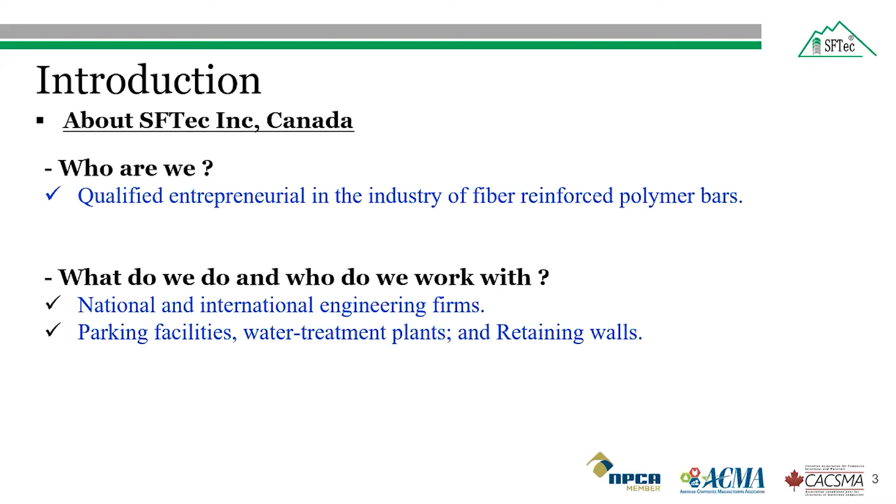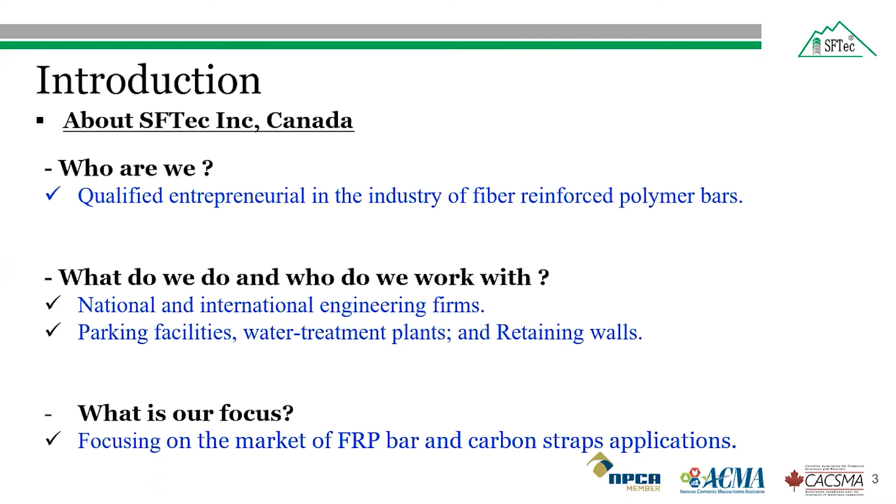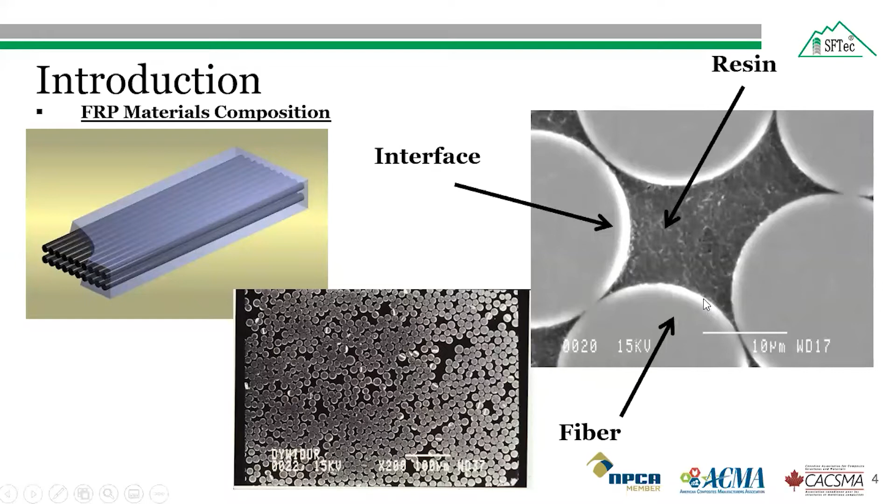Carbon fiber straps. The SFTec fiber reinforced polymer bars are made from composite materials as shown in this figure. It is made of fiber, which can be glass fiber or carbon fiber, and it is manufactured by a pultrusion process using a mixture of recycled fibers and resins. This figure shows a microscopic view of the FRP bar. Three different types of FRP bar, carbon, aramid, and glass, are generally available in the market.

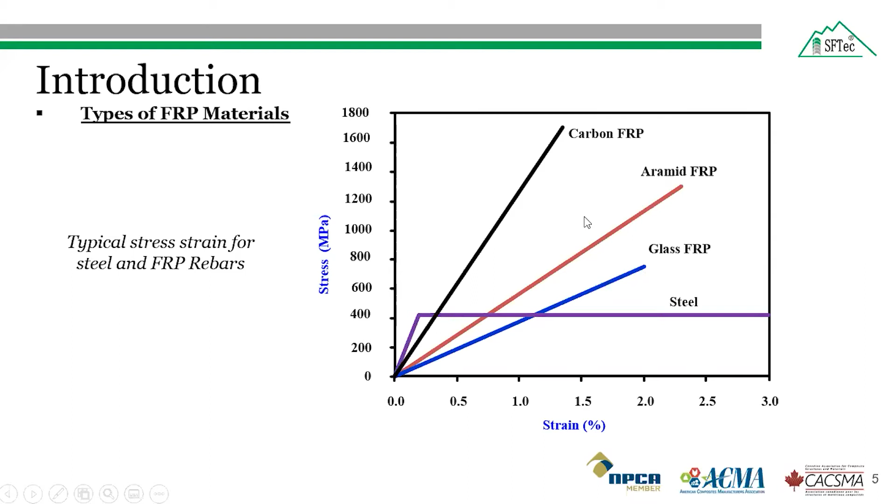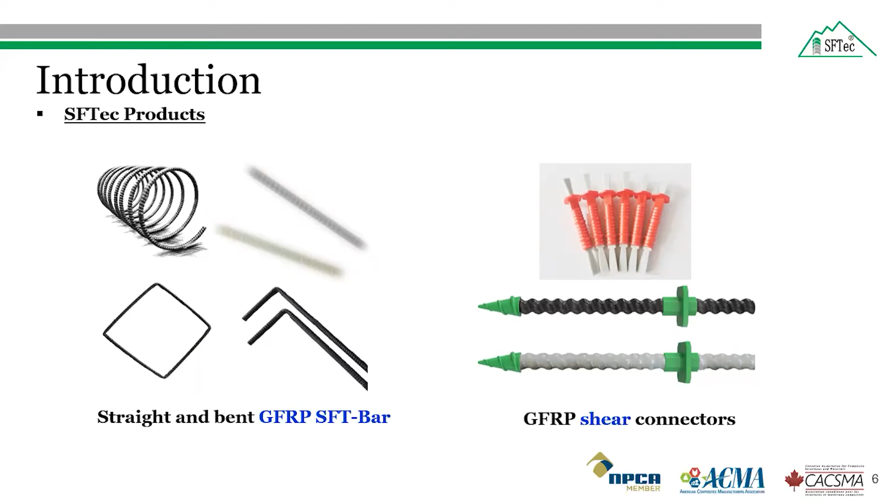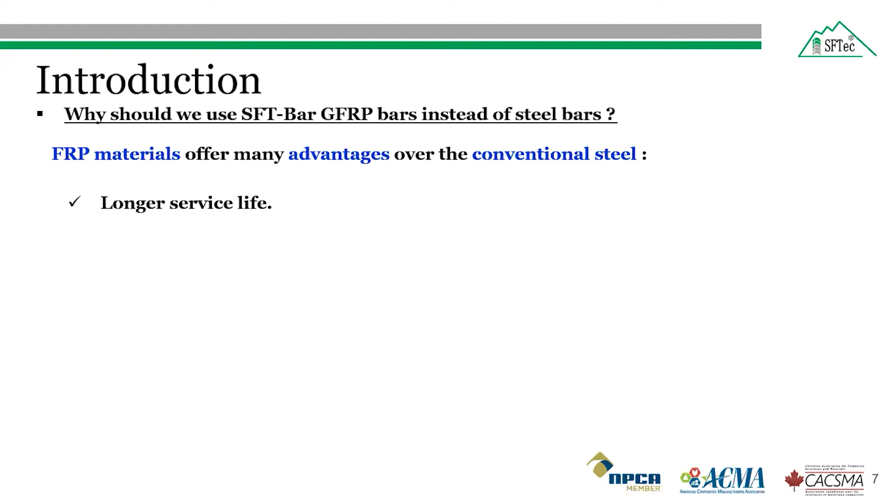And some of the advantages of the SFTec glass fiber reinforced polymer bars over the conventional steel bars are it has a longer service life because of its corrosion resistance, and therefore it has improved durability in harsh environments such as construction near the coastal area. And the FRP bar has better resistance against corrosion compared to the steel bar.

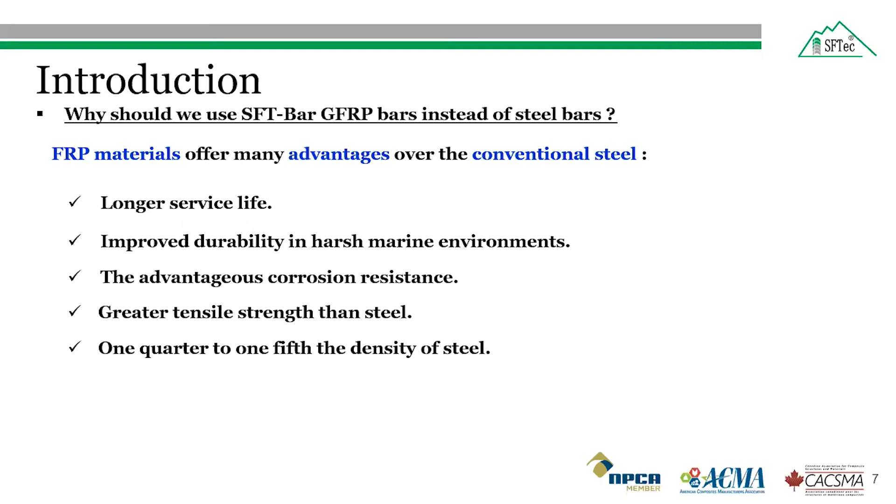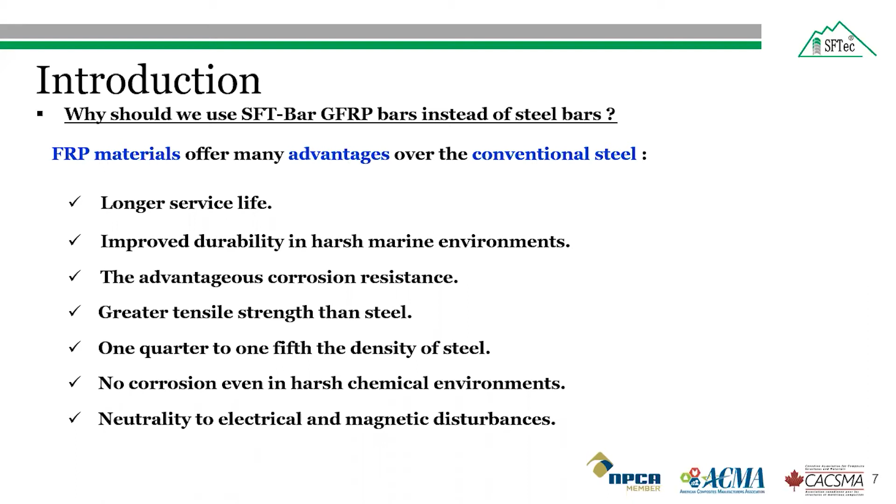As I told earlier, the tensile strength of FRP bar is 2 to 3 times more than that of the steel bar. However, FRP bars are lighter due to the low density compared to the steel bar. So therefore, the FRP bars are lightweight. And due to the corrosion resistance, FRP bars are good for harsh chemical environments as well. And it is neutral to electrical and magnetic disturbance. Therefore, it has a wider application in airports, military, MRI rooms in hospitals.

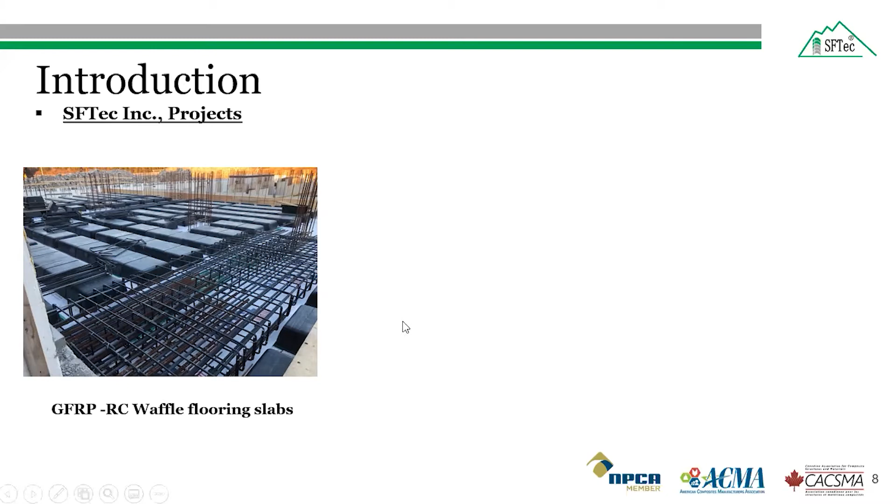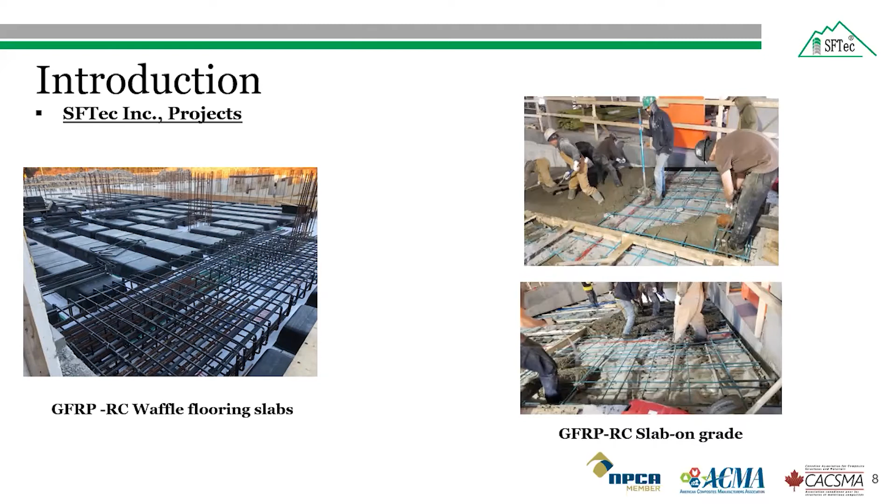And some of the selected field applications of the SFTec fiber reinforced polymer bars we have already done in Canada. Glass fiber reinforced polymer concrete waffle flooring slabs designed with SFTec glass fiber reinforced polymer, which was built last year in Halifax, Nova Scotia. And it can also be used for slab on grade. And slab on grade is a type of non-structural slab. And here it is a one-to-one replacement, and it will save a lot of money compared to the steel bar in terms of labor and transportation.

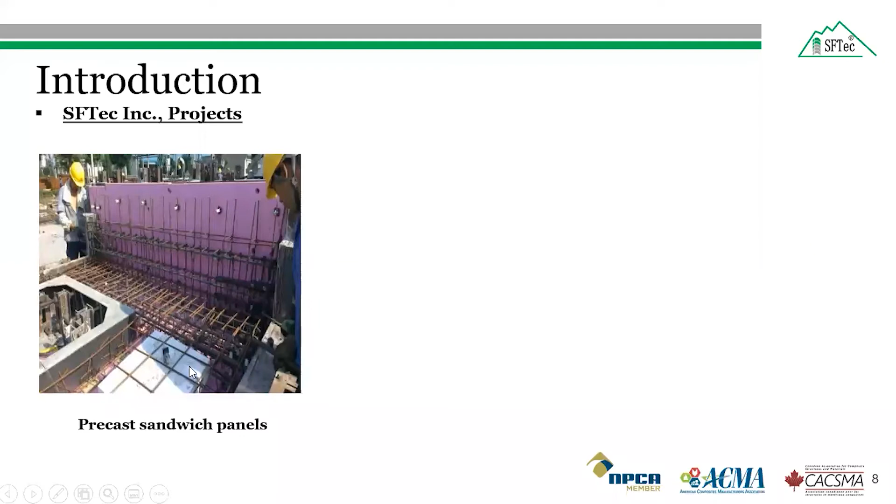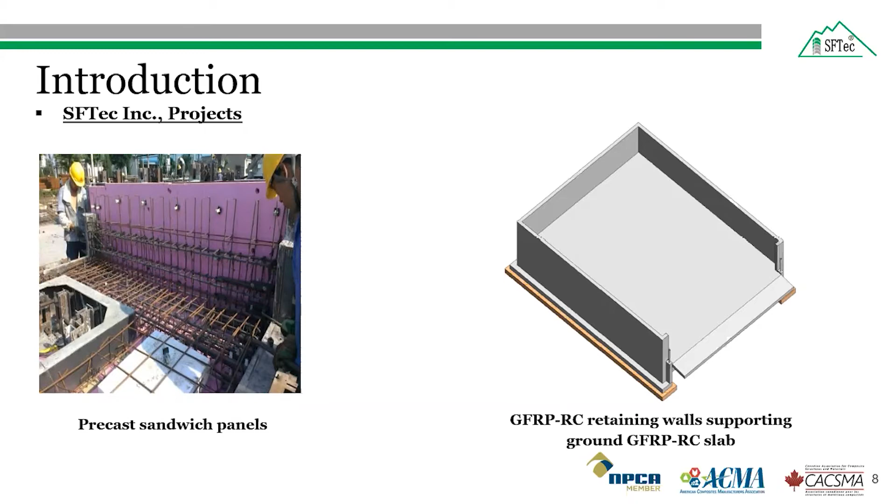Another project shows the cast on-site precast sandwich panels, and they have used our glass fiber reinforced polymer bars in their projects as reinforcement as shown in this figure. And it was built in China. And on the right side, it is a retaining wall which was built for the city of Montreal. And the retaining wall is designed to dump snow with de-icing salt during the winter. So they built this retaining wall with SFTec glass fiber reinforced polymer bar, which provides corrosion resistance against the chemicals used in the de-icing salts.

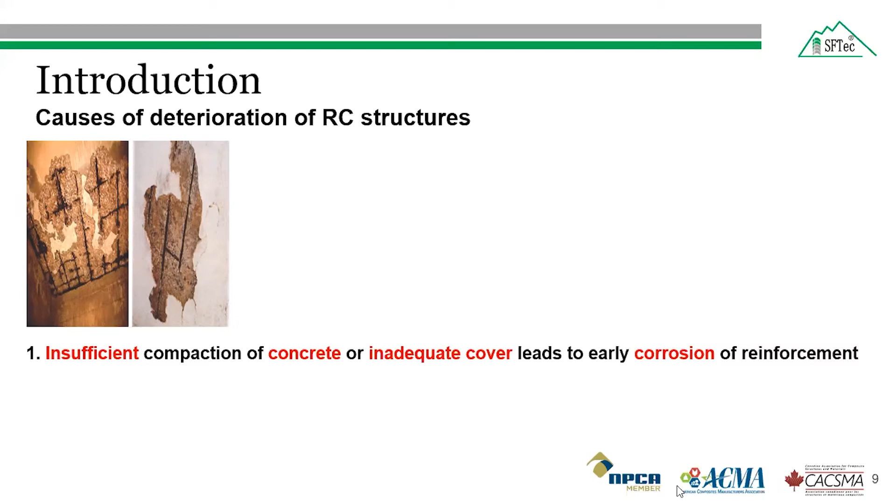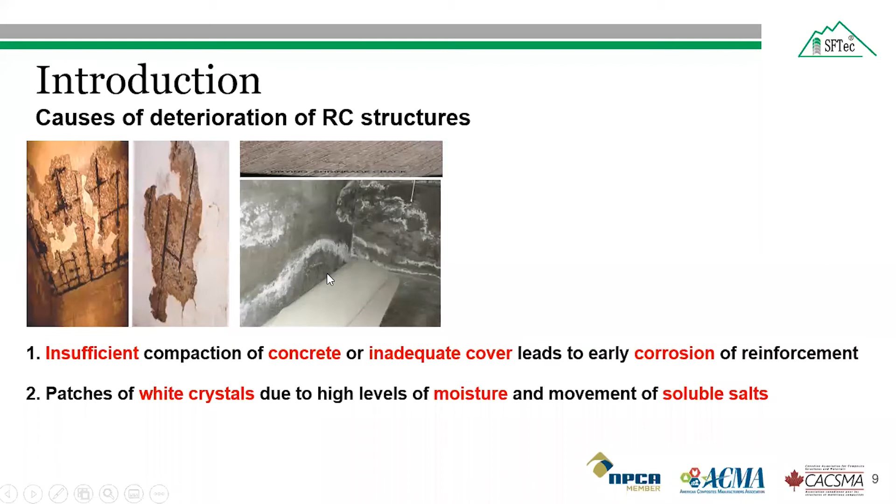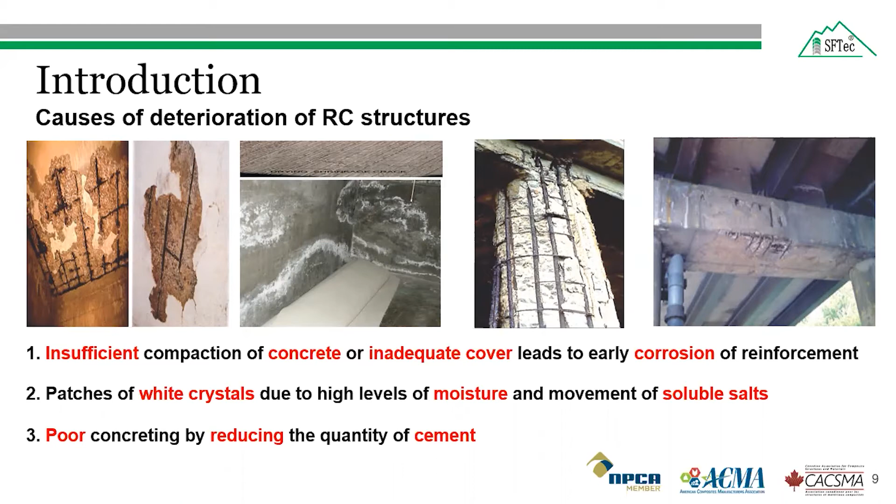Now coming back to our main presentation, the substandard workmanship in reinforced concrete structures due to insufficient compaction of concrete or inadequate cover to the reinforcement causes corrosion of the steel bars, and high levels of moisture and excessive fluctuations in heating and cooling can promote the movement of soluble salt, which leads to patches of white crystal as shown in this figure, and can cause considerable damage to the concrete structure. And if the minimum quantity of cement is not provided, it will lead to poor workability and lower the strength of the concrete. Therefore, it will require external strengthening.

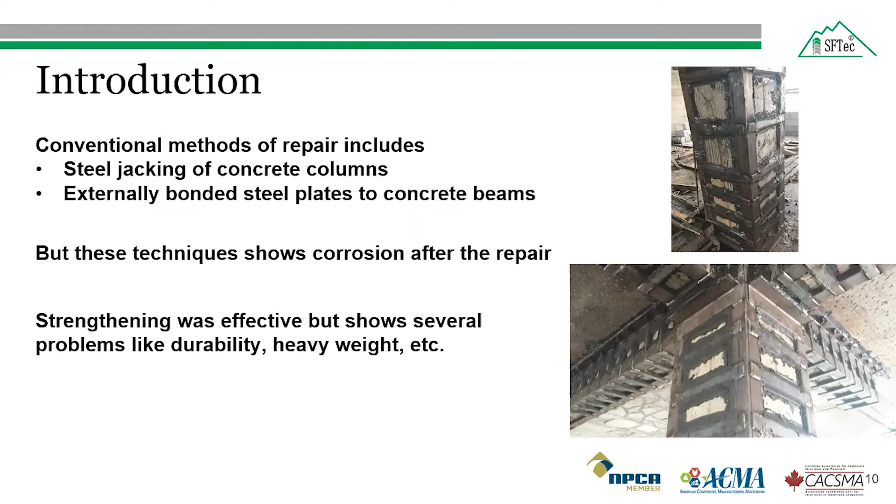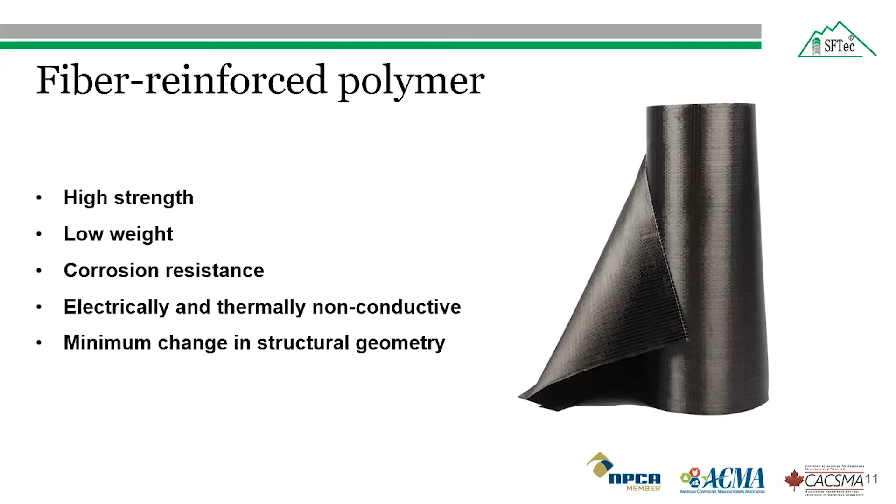The conventional method of repair includes steel jacketing of concrete columns or externally bonded steel plates to concrete beams as shown in this figure. So this strengthening technique using the conventional method was found to be effective. However, these techniques are not cost effective and may lead to corrosion after the repair due to the environmental conditions. So now with the advancement of composite materials, which were earlier used in the aerospace industries, when it came to civil engineering, fiber reinforced polymer composite was found to be beneficial due to its high strength, low weight, and resistance against corrosion.

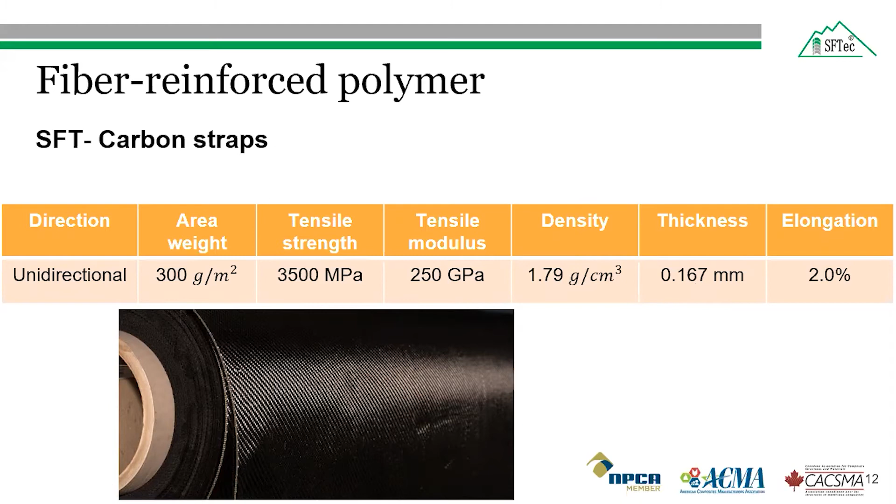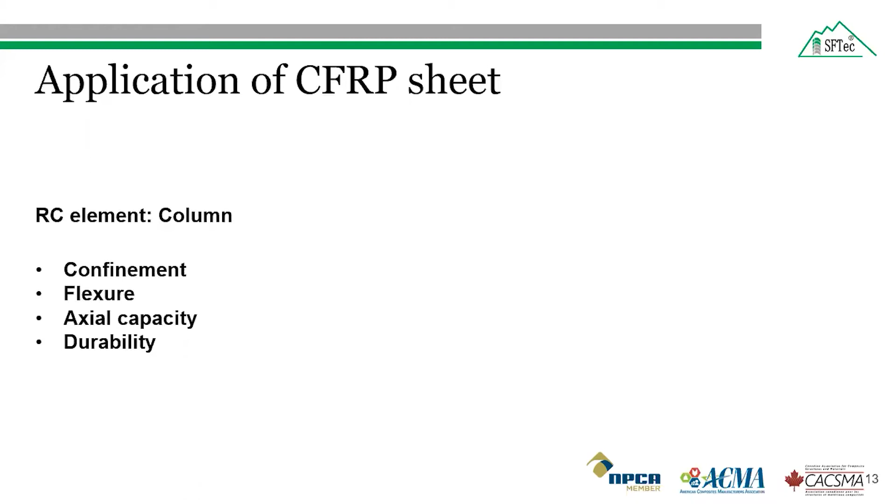And our product SFT-CarbonStrap has a tensile strength of 3,500 megapascal and a thickness of 0.167 millimeter. Therefore, the strengthening of concrete structures using carbon fiber fabric has a minimum change in the structural geometry, because the thickness of the SFT carbon strap is around 2 by 10 of a millimeter. The carbon fiber reinforced polymer sheets can be used to strengthen reinforced concrete elements such as columns, and it could improve the flexural and axial capacity of the column, as well as improve the durability by increasing its service life. As I told earlier, the carbon fibers are corrosion resistant, so it can improve its service life.

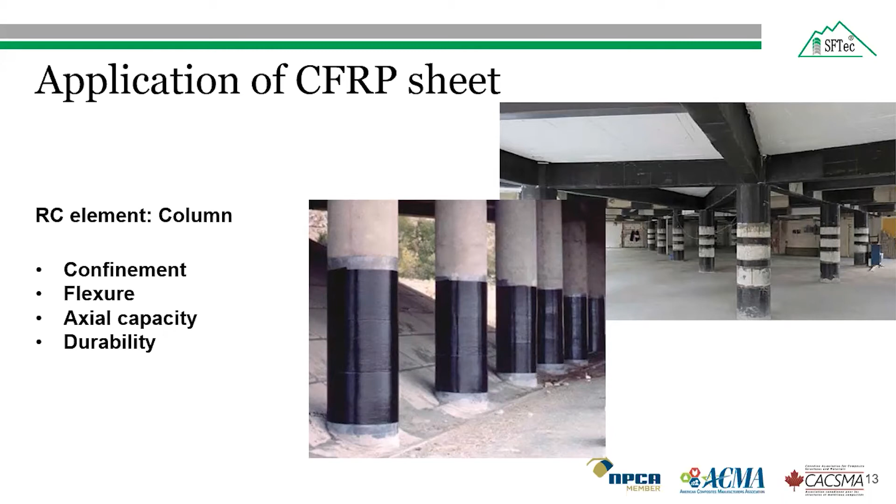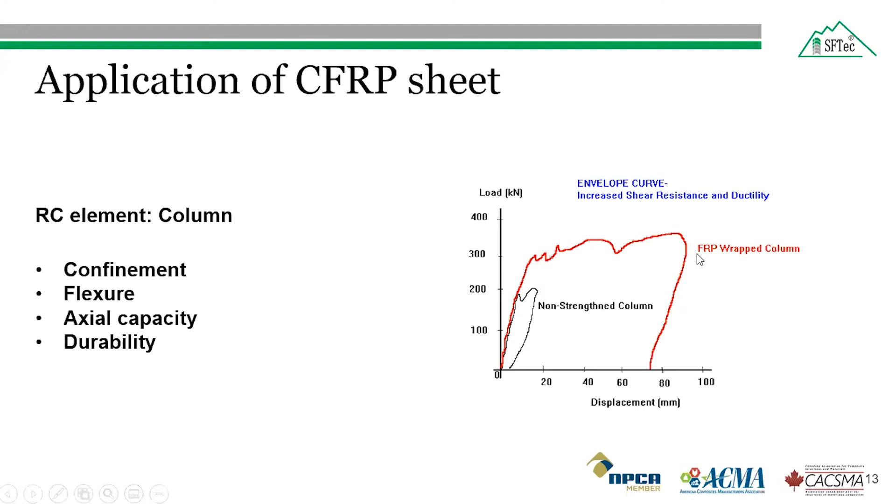And as well as the ultimate displacement reached by the column strengthened with FRP was much higher than the non-strengthened column. The carbon fiber reinforced polymer sheets can also be used to strengthen reinforced concrete beams, either in shear or in flexure.

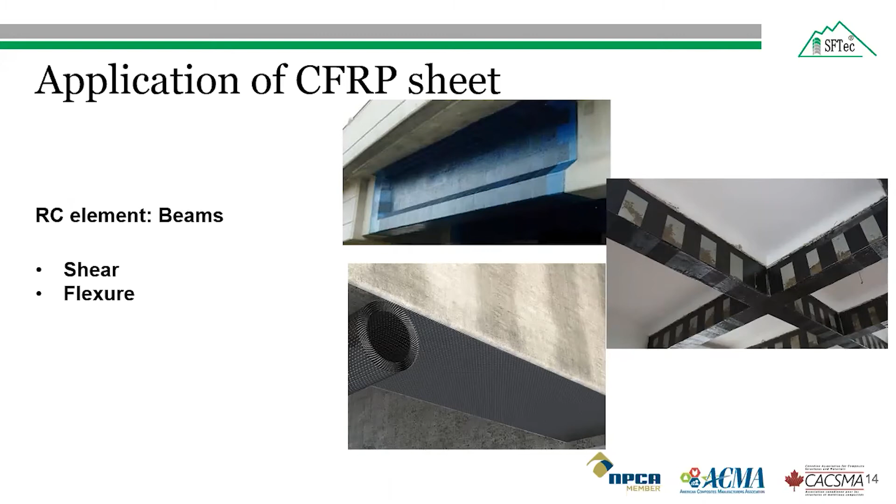So ideally, these are used for the shear strengthening of RC beams, which can be strengthened in shear by providing a full wrap around the beam section, a three-sided wrap for T-beam sections, or two-sided wraps. And in case of reinforced concrete walls, which we generally see underground, or shear walls in high-rise buildings or in reinforced concrete bridges, the carbon fiber reinforced polymer can provide both shear and flexural strengthening.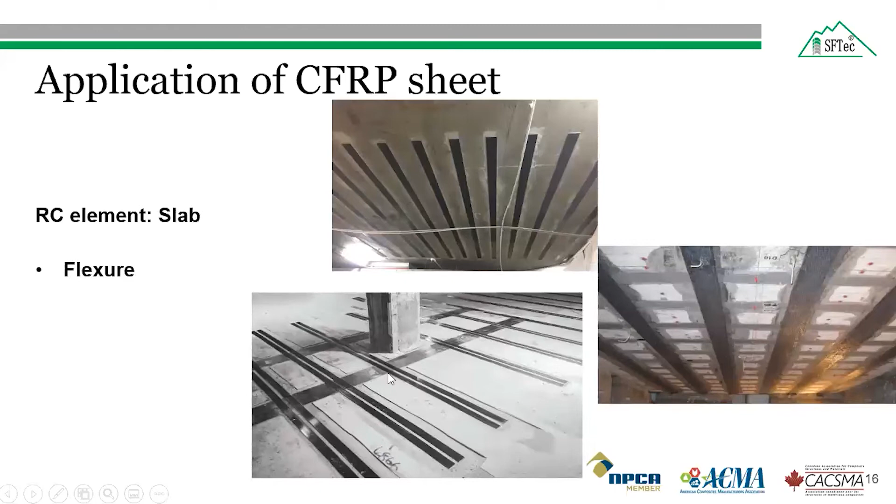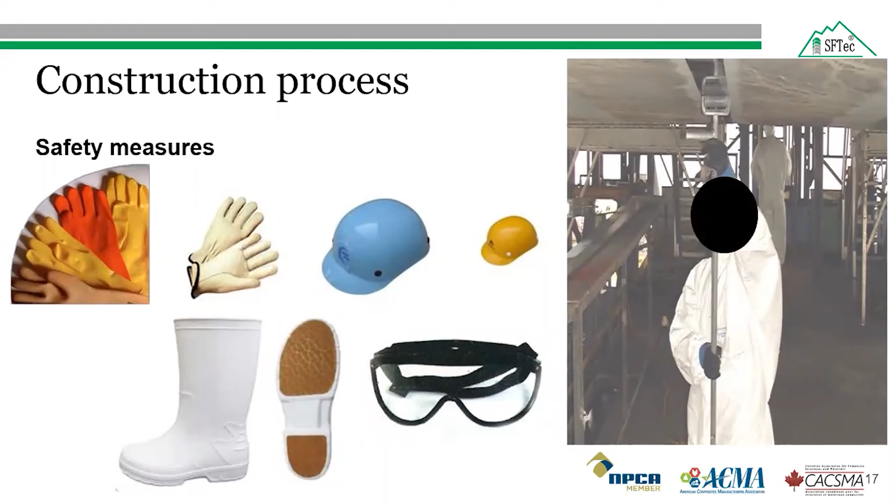Now, safety measures and precautions should be followed while using fiber reinforced polymer composites, because the material we use here is sometimes glass fiber. When the glass fiber is mixed with epoxy, it can become actual glass, so it can be dangerous when you are working with bare hands. So the use of personal protective equipment as shown is essential to avoid eye and skin irritation.

And I will give a reference of the various codes and guidelines at the end of this presentation. Some codes like ACI 562 are used to evaluate the structural performance, or do an inspection or seismic evaluation of a structure. Once the evaluation of the structure is done, like you can see here, this structure's cover has completely spalled off and the bars are already corroded. This kind of structure can be repaired.

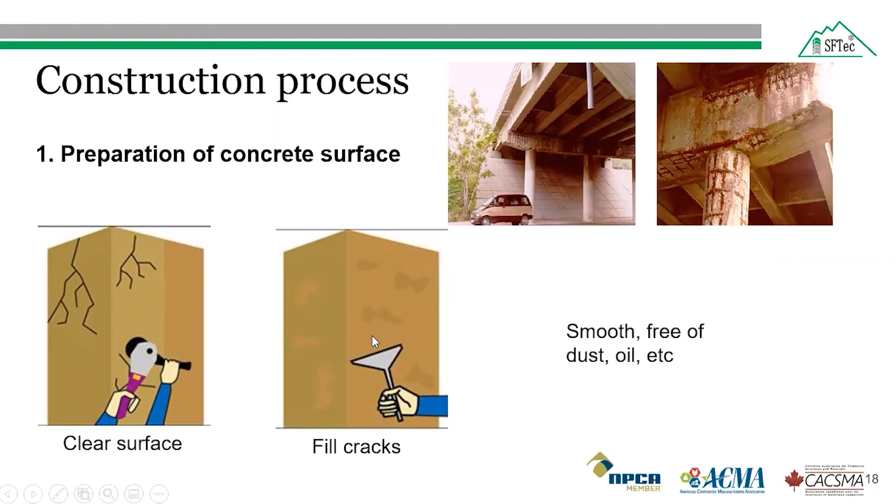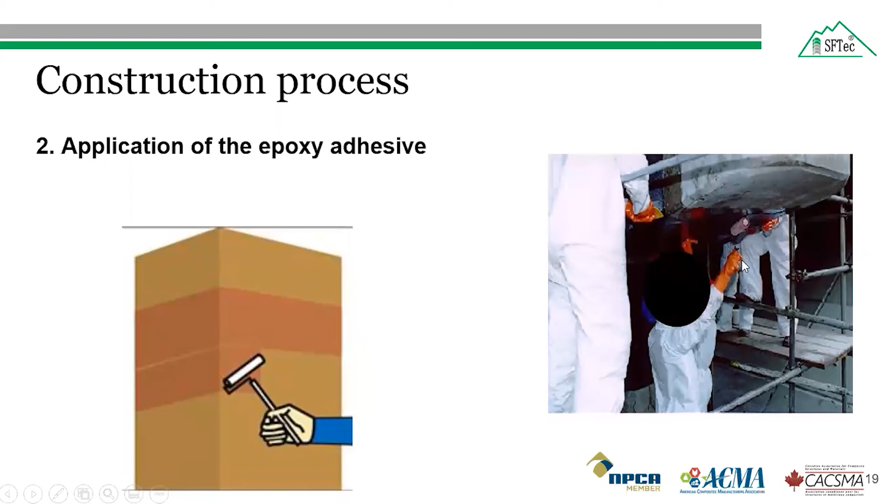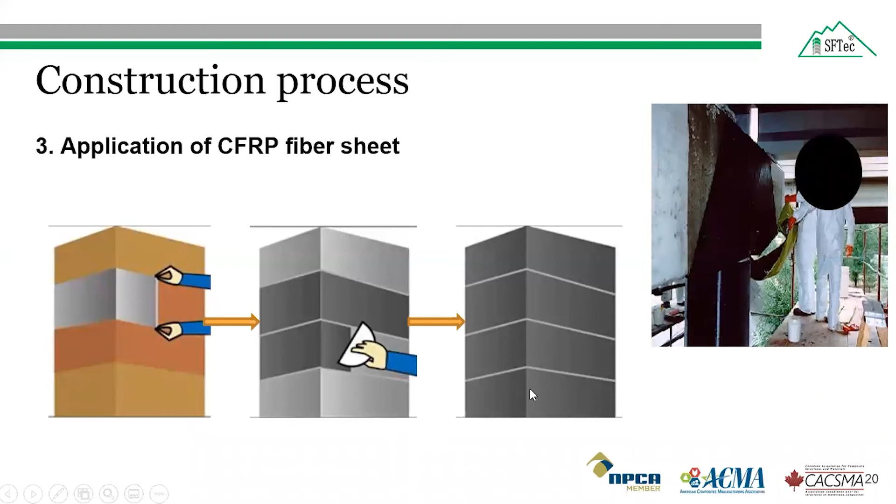The construction process of repairing starts by cleaning the surface, removing oil or dust from the surface, then filling the cracks with grout. Once the surface is free of oil and dust and has been grouted, the epoxy adhesive is applied on the clean surface using a roller, followed by the application of the carbon fiber sheet using a roller. The applied carbon fiber sheet is covered with a grout to provide a protective layer or resistance against fire.

Two scenarios were considered which analyzed the future worth of both conventional and surface bonded fiber reinforced polymer technology, for a design life of 30 years. In scenario 1, the conventional repair was designed for a service life of 15 years and should be repaired again after 15 years, so it will be repaired 2 times.

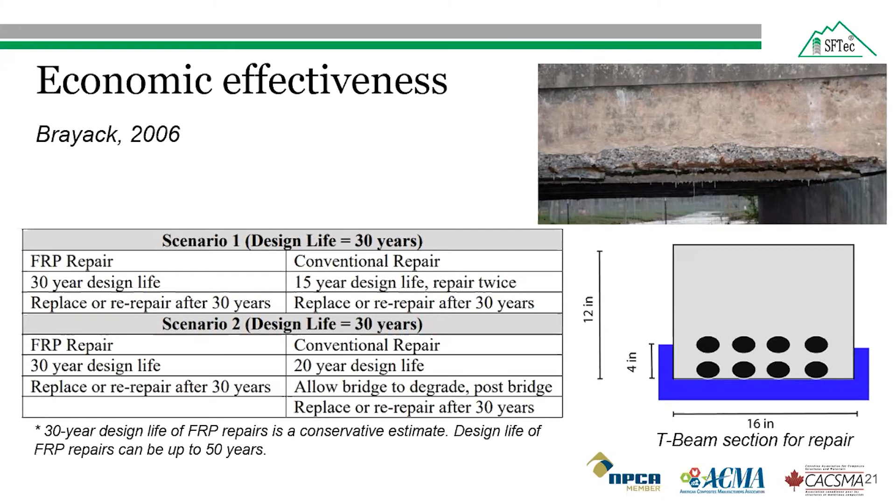In scenario 2, the conventional repair had a design life of 20 years and will be allowed to degrade after 20 years, and after the completion of the 30 years, it will be either replaced or repaired. However, in both scenario 1 and scenario 2, FRP repair will serve for a conservative design life of 30 years. I'm saying conservative because FRP repair can have a design life up to 50 years. Therefore, fiber reinforced polymer repair has a better design life than conventional repair.

Now, coming to the cost part, a present worth analysis was conducted to compare the initial and life cycle cost for the conventional and fiber reinforced polymer techniques. The first scenario included re-repair after 15 years for the conventional repair, but there was no re-repair in the case of the fiber reinforced polymer.

So for the conventional method, the present worth cost of the first scenario was $5,000, which was compared to $3,400 for FRP repair, which is much higher because in conventional we have to repair the structure 2 times. But in scenario 2, a present worth analysis does not apply because it doesn't include a future repair. So here we can see that the FRP repair improved the design life without increasing the cost of the structure.

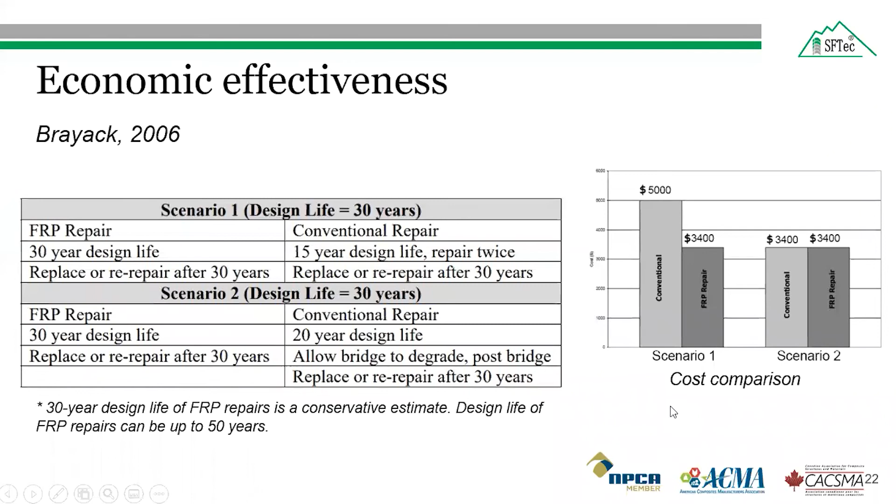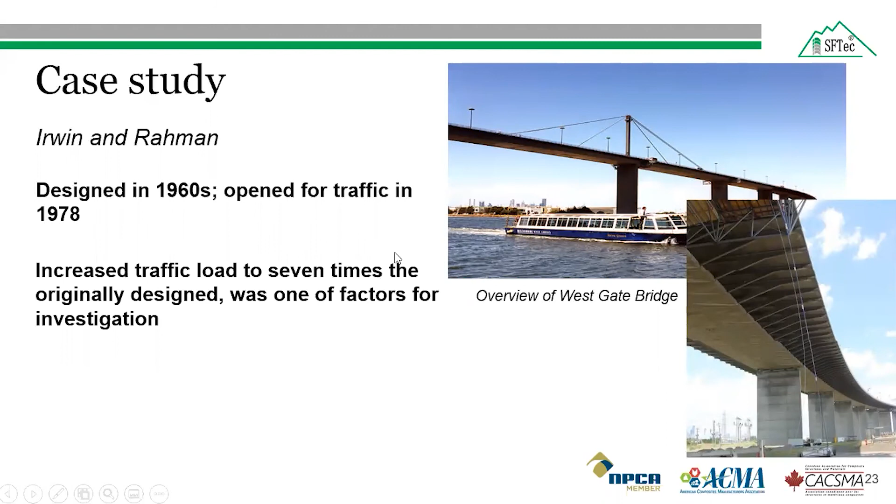Now the first case study is of the strengthening of the West Gate Bridge in Australia, and the bridge was designed in the 1960s and opened for traffic in 1978. However, the increased traffic load to 7 times the originally designed traffic volume was one of the factors for investigations of the bridge's structural health. And the investigation found several areas such as the box girder, deck slab or cantilever frame of the bridge had insufficient capacity. So this figure shows where the strengthening was required.

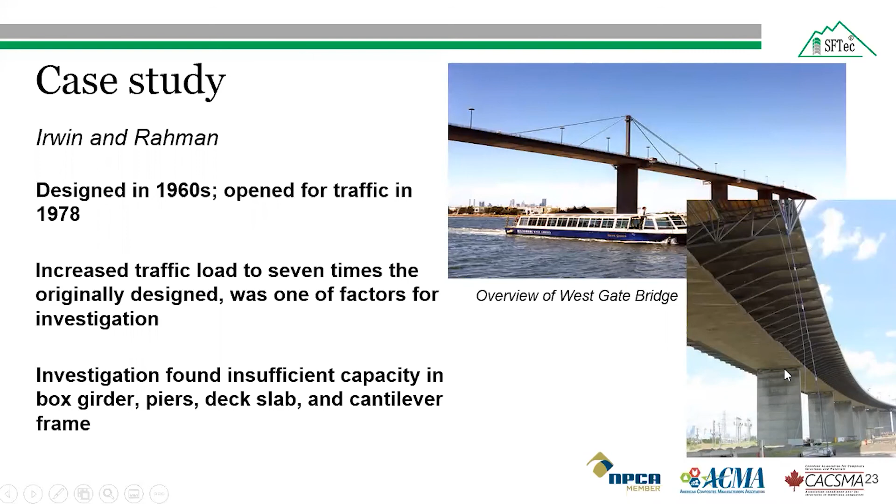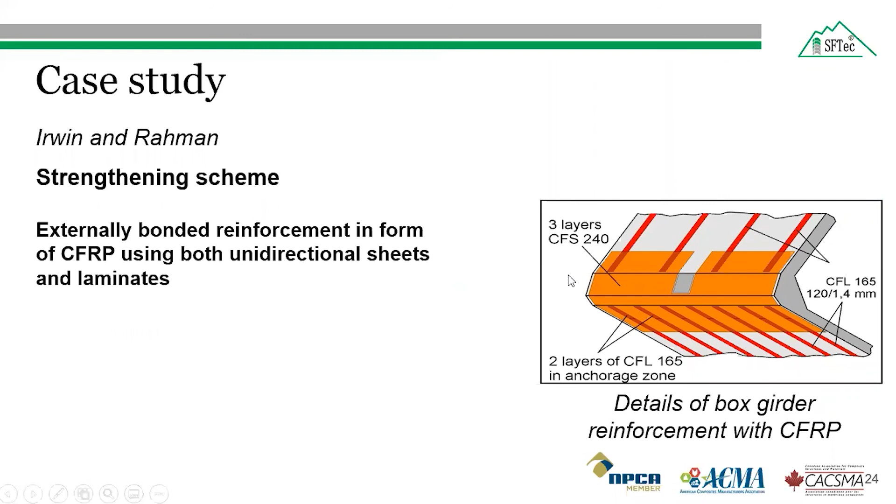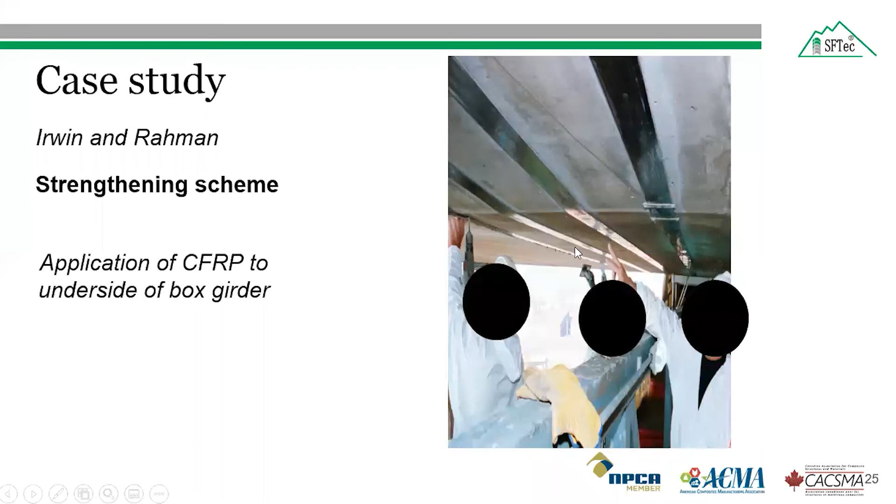So they came up with the following strengthening scheme for the box girder, where externally bonded carbon fiber in the form of 3 layers of unidirectional carbon fiber sheets and 2 layers of carbon fiber laminates were used. So this figure shows the installation of the 2 layers of carbon fiber laminates on the underside of the box girder, as shown here in this figure. So this shows the practical use of those laminates.

And the flexural capacity of the deck slab was enhanced by providing carbon fiber laminates in the negative moment region above the piers. So above the pier, if you see here, there is a strip of carbon fiber sheets which is provided in the negative moment region, and in the positive moment region in the span direction, if you see all these parallel FRP sheets which are provided in the positive moment region.

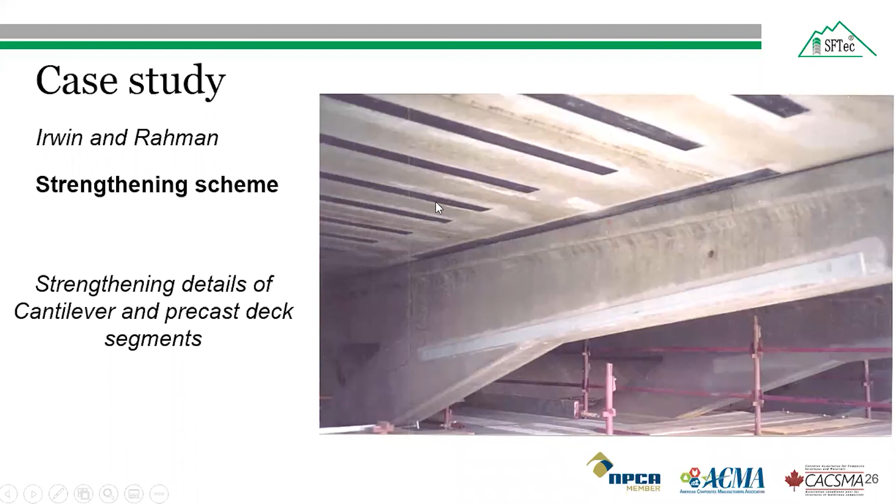So coming to another practical example of the application of carbon fiber sheets is the repair of the concrete bridge corbel support of the Jaques Lodge Bridge, Calgary, in Canada. And as shown in this figure, the concrete corbel supporting the main girder had cracking. As you can see here, there is cracking here, and this cracking was due to unexpected friction forces and a lack of sufficient internal diagonal steel reinforcement.

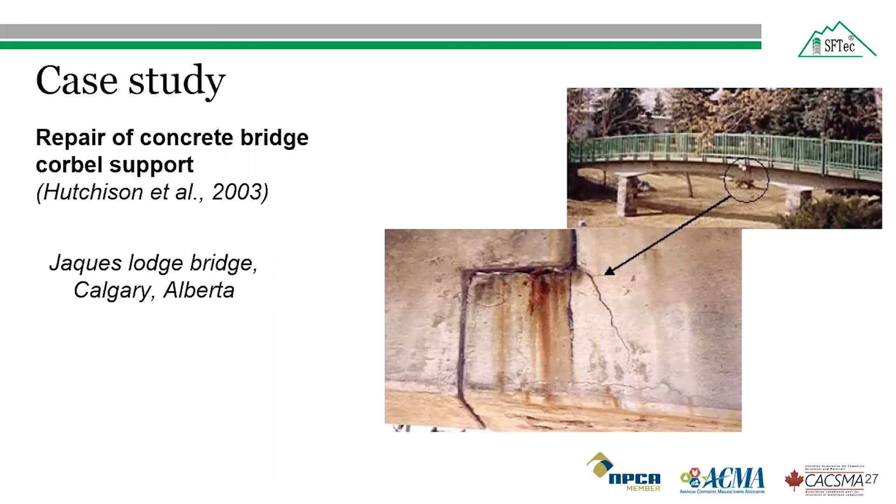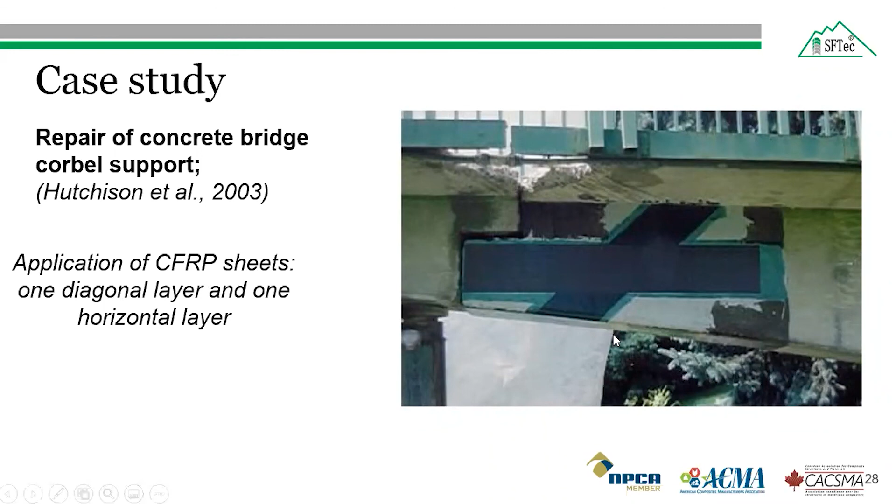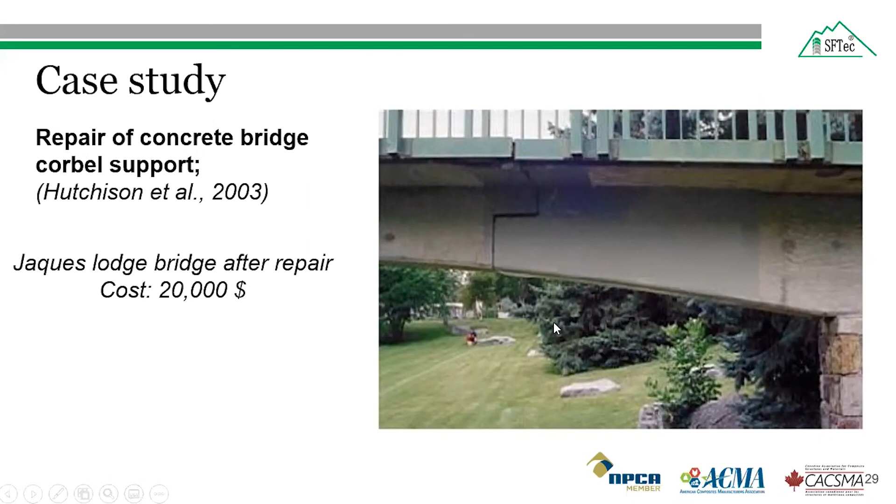So therefore, to overcome this problem, they suggested external strengthening, because we can't provide any internal diagonal steel reinforcement now. Therefore, a strut and tie model was used to design the carbon fiber strengthening scheme. A single horizontal layer and a diagonal layer of carbon fiber sheets were applied on each side of the corbel, and you can see this bridge has been supported here. This support was removed once the curing of the carbon fiber sheet was completed, and a protective coating was applied over here, and the total duration taken for the repair was around 6 weeks, and it cost around $20,000.

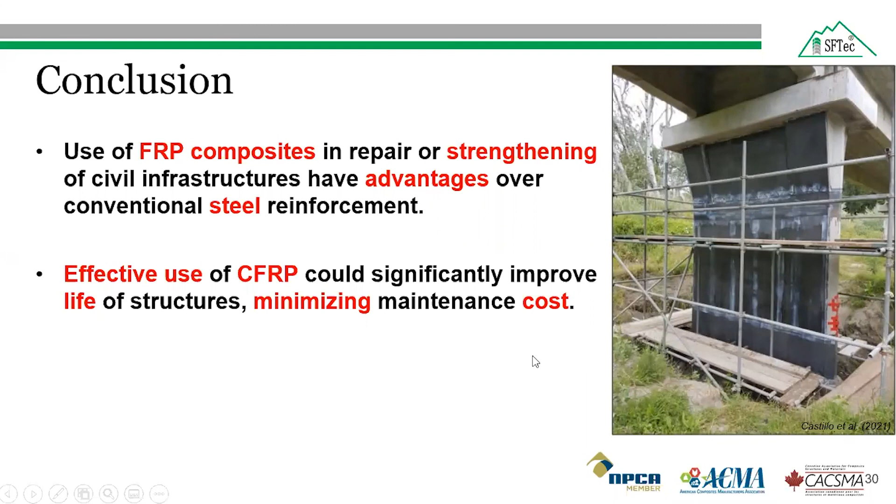Now coming to the conclusion part, due to the high strength to weight ratio and the minimum change in the structural geometry, the use of fiber reinforced polymer composites in strengthening has advantages over conventional steel plates. Fiber reinforced polymer composites are corrosion resistant, which improves the service life of the structure while concurrently reducing the maintenance cost. And the case studies demonstrate successful repair of reinforced concrete bridges.

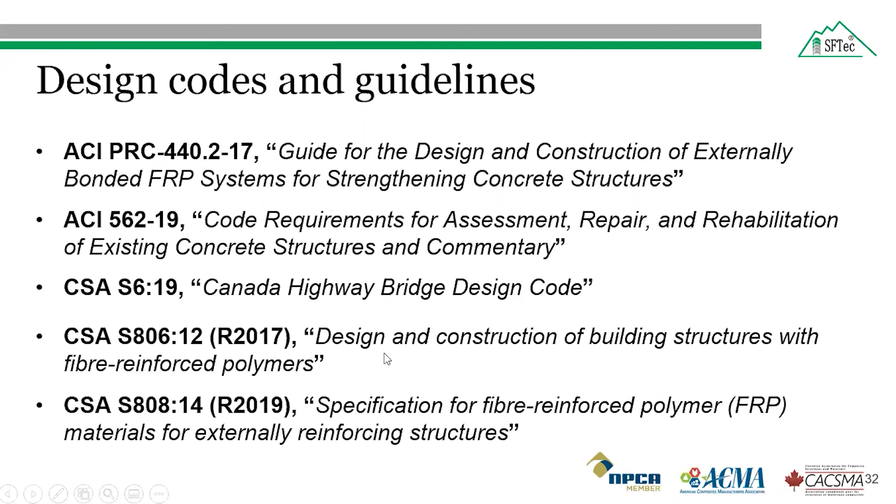These are the list of the North American design codes and guidelines for externally bonded fiber reinforced polymer systems for strengthening of concrete structures. ACI 562 is generally used for assessment, repair and rehabilitation, and other codes like 440 are used for the design, and this is for the Canadian Bridge Code, this for buildings, and the last one is for materials. This is used for material testing.